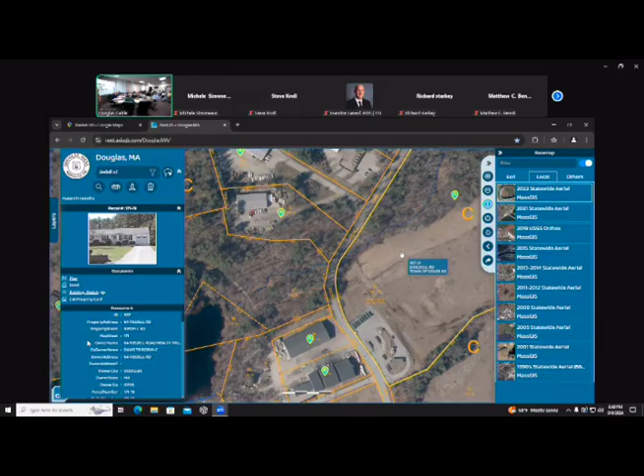So then what they want to do is put the pipe in right here, and the beauty is that this property is owned by the town of Douglas, so there's no problems with ownership or putting a structure on the site. So you're just going to go from this overflow area across to alleviate the flooding, so these areas do not get flooded. So it's not like the water's coming from the road or from any of these businesses, it's just backup from the brook here.

So Brandon, is there any reason why they just don't make the existing culverts larger? I'm guessing time and money. That makes sense. Not that they haven't done it in other places, but that's where we're at with this one.

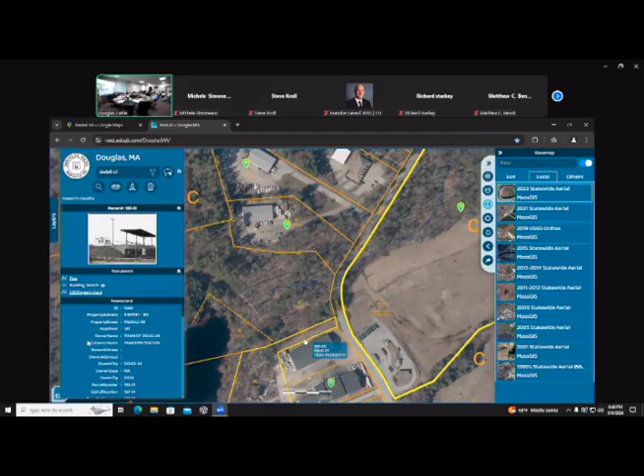Want me to make a motion? Or, I don't know, are we okay to, I know we have some concerns, but are we okay to let them proceed with this emergency order? Are we going to take a vote? Yes. I don't agree with that. Okay, so all right, we should maybe spend a little more time on the emergency, you know?

Well, you have your opinion, and that's my own opinion too. That's good.

Does anyone want to make a motion to approve the emergency order? I will make a motion for an emergency certificate for Rydell Road and 9 Rydell Road to put in 12-inch outlet pipes and discharge to the town property, for 30 days to do the work.

Okay, motion's been made. Does anyone want to second that? Brendan Doyle seconds. Motion's been made and seconded. Can I get a vote? Jim Foran, aye. Brendan Doyle, aye.

You can vote if you'd like. Can I abstain? Yes, sure you can. Kate Thompson, abstain. Mike Greco, aye. Mark Mungem, aye. Josiah Birch, no. Put that on the record, no. I don't agree with that. I'm surprised, Mark, that you're agreeing with this. But that's my vote, no. Okay, thank you.

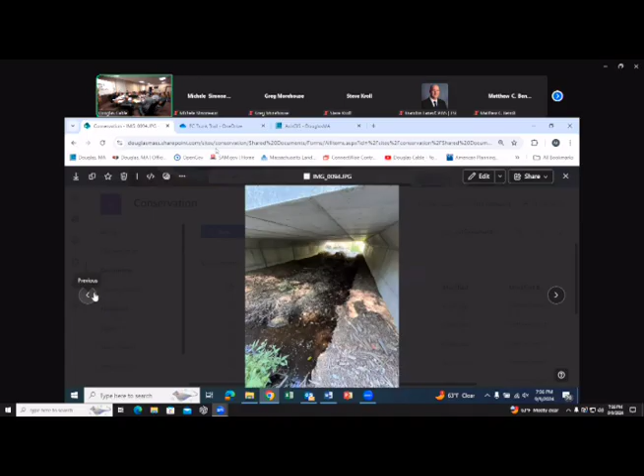Sometimes I don't take good pictures. It's kind of my own fault, usually. Like, sometimes I'll just look at it from too low or something. Brandon, you got to take the pictures. I'm just kidding. I mean, it all looks good, nice and clean. Looks like good work there.

Just wanted to make sure the basin itself has some habitat value, with low-maintenance grasses and wildflowers and things like that. It was a wet meadow mix used for the basin and side slopes. Good.

Anybody else have any thoughts or questions? Are we okay with this? Yeah, I'm okay. All right, you want to make a motion?

Sure, I'll make a motion for certificate of compliance for DEP 143-1076, McIntyre Looms Incorporated, off Legacy Circle, map 166, lot 15. I have a second, Brendan Doyle, second. Motion's been made and seconded to approve the certificate of compliance for Legacy Circle.

All those in favor? Jim Foran, aye. Brendan Doyle, aye. Kate Thompson, aye. Mike Greco, aye. Josiah Birch, aye. Mark Mungem, aye. Thank you. Thanks for your time, we appreciate it.

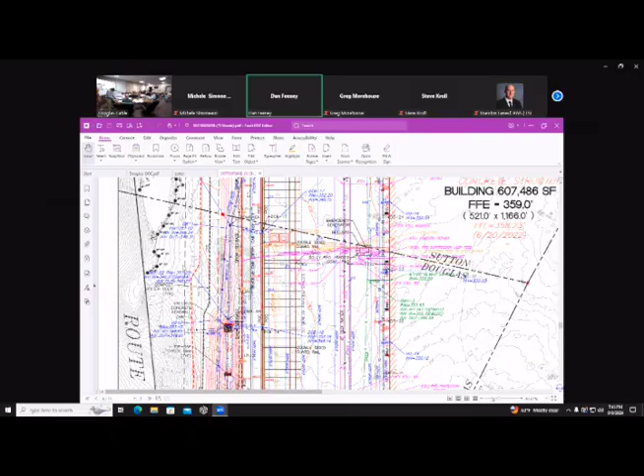As noted before, the red line's a little bit messy, but I'll zoom out a little bit here. The building itself is in Uxbridge, Douglas, and Sutton. The Douglas portion is the western portion of the site. There was an isolated wetland located along the Route 146 right-of-way, with the buffer zone coming out into this area. Scrolling down, there's another wetland along the Route 146 right-of-way that comes off the property. That 100-foot buffer zone comes right to the edge of the grading and then swings around, coming out further into the site down in Uxbridge.

This was the swale I referenced earlier - stormwater from a portion of the roof drainage as well as the northern section of the western loading court comes down into the swale, which then flows down, eventually discharging to one of the main basins on the site, infiltration basin 2 in Uxbridge. Very little of the site is in buffer in Sutton, but there was some, so we did give an order of conditions for that work. It's very minimal, thank you.

So, were there any deviations from the plan? Let me just ask you that - in Douglas, against, in the buffer?

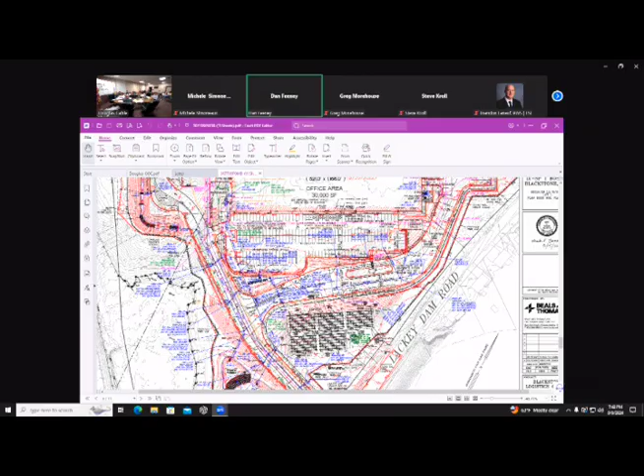The entry location to the building was changed from the original plans, from the center to the side of the building. An underground system was added up in the northern area of the western loading court. Groundwater is pretty deep at the site, but during wet periods all of the upgradient water would want to break out on occasion. So to stabilize that, an underground system was put in that discharges down into the swale area and eventually ties into the drainage system.

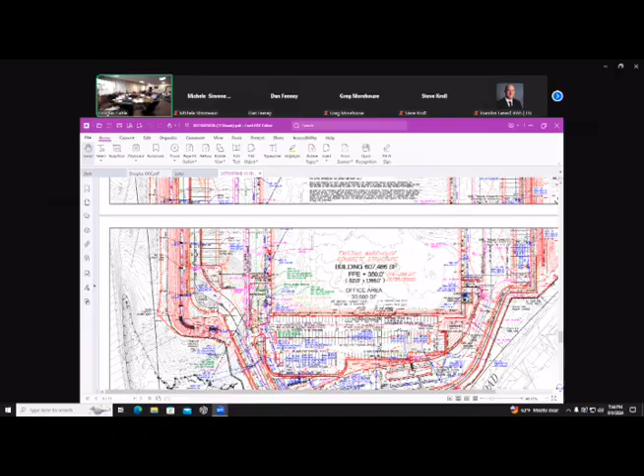Okay, thank you. Brandon or Matt, did you review this, and do you see any issues with it? No, I do not. I took some photos if you want to see them, but I think it was described very well by the applicant.

I'm okay to not see the photos. Does anyone want to see the photos? Okay. I'm good with this. You want to make a motion?

Sure, make a motion for a certificate of compliance for DP 143-1017 for Scannell Properties, 0 Route 146, map 141, lot 3, 4, 5, and 6.

Does anyone have a second? Second, Mike Greco, second. All those in favor of issuing the certificate of compliance for DP-143-1017 Scannell Properties? Jim Foran, aye. Brendan Doyle, aye. Kate Thompson, aye. Mike Greco, aye. Josiah Birch, aye. Mark Mungem, aye. Thank you very much. All right, thank you, I appreciate it.

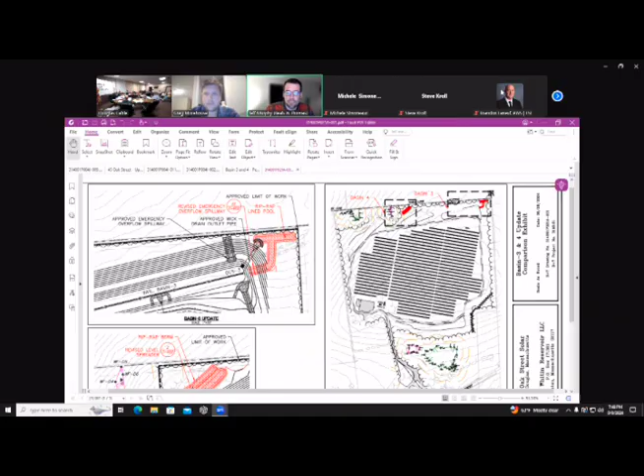As Greg mentioned, the changes are to Basin 3 and 4, along the far eastern side of the property. Basin 4 is the one that has the change in the 100-foot buffer zone. You can see on this blow up, the outer portion of the 100-foot buffer zone crosses through this figure. The grading of the basin shown in black is the originally approved basin, which the grading itself and the outlet control structure and pipe have not changed.

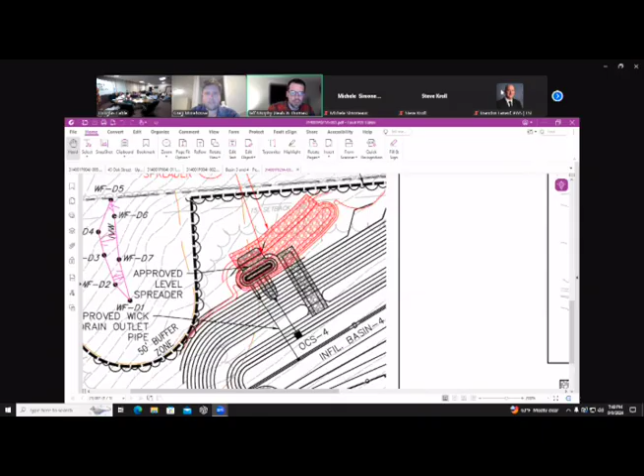The change is to the level spreader, or water dispersion feature, down gradient of the basin outlet pipe. Originally the basin outflow would come through this riprap swale and into this smaller area. As a result of discussions with the Krolls, the desire was to spread out the water over a longer, wider area, to have it go more in the southeasterly direction towards the upper right as you view the plan.

So in order to do that, we extended that level spreader pool out to the right as you view the plan, and added a bit more riprap down gradient of the level spreader weir, which is this more bold red line running through the middle, resulting in a little more riprap and regrading of that feature compared to the original smaller level spreader pool.

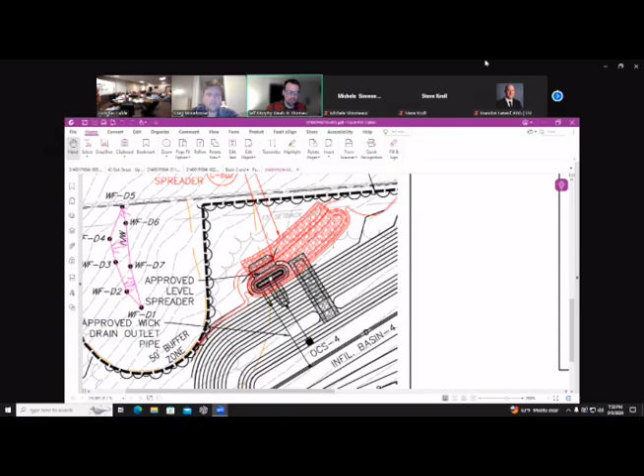Okay. It should be noted that this is within the approved limit of work, which hasn't changed. The dark dashed line with the tree line here is the original approved limit of work.

Is the pool still going to be in the same location, or is there not a pool at all with this proposed plan? It's the same location starting at the left side, but it just extends linearly more out to the right, generally in a similar location, but it'll allow the water to be carried out further to the right over a broader distance. That solid black line should be thought of as extending all the way over to the right side. Correct, yes, it would be extending all the way over, like a linear shaped bowl, with a curved weir that the water will flow up and over.

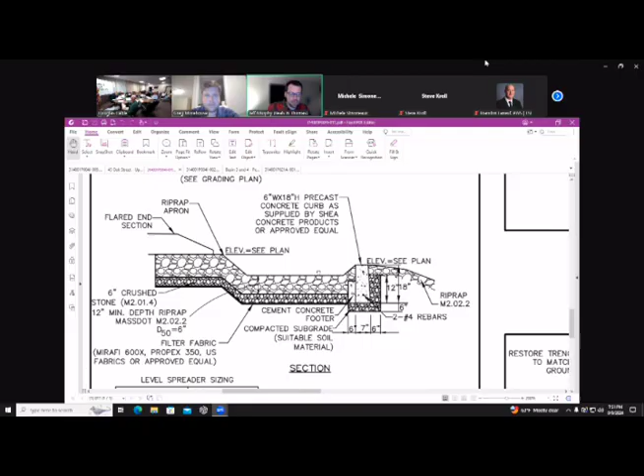Trying to show it in cross section. It's going to have a little curved weir here, and then there's some grading around the ends of the pool to contain the water and force it through that curved weir section.

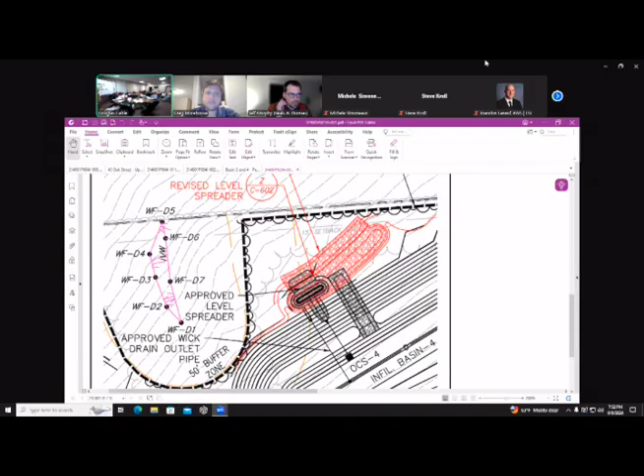So looking at this, it begs the question: is the outfall pipe already installed in the pool section that was part of the original plan? Or could that pool move out of the wetland buffer and just be to the right, outside the buffer zone? The outlet control structure and swale is already built. It is, okay. Alright.

This pool area looks like it works into the other riprap area coming out of the basin. Is that a spillway there? Yeah, that's correct, I forgot to mention that. The Krolls had requested that the spillway be directed into this dispersal pool, whereas before they were operating kind of separately. So yes, it would tie into that same pool.

So it looks like the area of work within the buffer zone is a little bit greater. How much more work is in the buffer zone with this plan? Looking at the outer fringes in red here, I think I got about 380 square feet, and about 100 of that is just more riprap to armor this end of it.

And then this outer portion will just be vegetated with grass. I think it's a better plan to include the spillway and have it go through this revised level spreader area, so from that perspective, I think it's a better plan. Do any other commission members have concerns or thoughts?

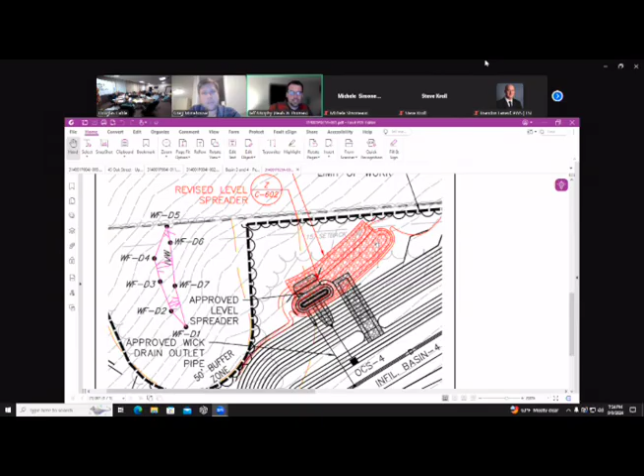I was curious why the change was made. Primarily to disperse water over a broader area rather than have it travel in a more concentrated spot, spreading it out over a greater distance parallel with the contour of the slope.

I'll try to explain, Brandon. The neighbor below this property is in Sutton, at the Sutton town line. They farm trees and other things on this property below, and they were concerned that they weren't getting enough water spread out, that it was becoming pointed and going directly to the wetland, and they wanted to receive some of the water. Is that correct, an explanation?

Can you hear me? Yeah, this is Steve Kroll. Can you hear me? Mr. Kroll. Oh yes, Mr. Kroll. Yep, I hear you. Okay, so what you just said is accurate for the Basin 4 changes.

This is a function of the way the slope of this land continues downhill for a fair distance towards Manchaug Pond, towards Stevens Pond, towards Shore Road. It's not parallel to the property line, and the goal was to have the water along the property line. There's a nice stone wall that's been acting as a dispersion or spreader for decades, if not hundreds of years, and the goal was to distribute the water so it doesn't erode the topsoil within our tree groves, which is what happened during the crazy rains.

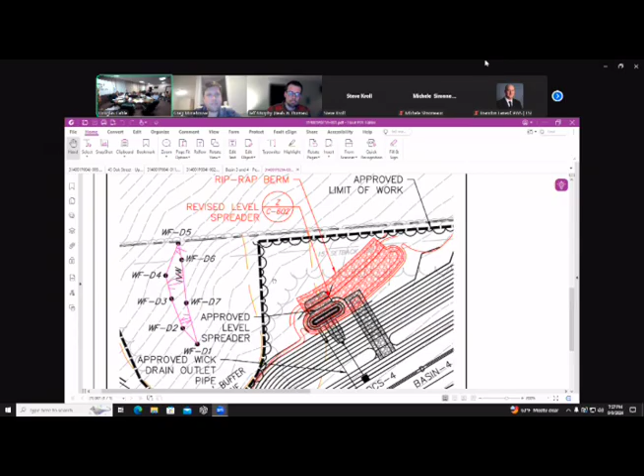Mr. Chairman, for the record, there was a peer review conducted for the planning board, and the planning board voted to approve this minor modification of their approved plan. But part of the peer review recommended they come to conservation because it encroached into the buffer zone. That's why they're here.

Are you good? I'm very good. I think it's an improvement. I agree.

Make a motion for Blue Wave Solar, minor modifications for 45 Oak Street, DEP 143-0989, to be approved as a minor modification, with minor modifications.

Okay, motion's been made. Is there a second? Second, Mike Greco. All those in favor of the approval of the minor modification for 45 Oak Street? Jim Foran, aye. Brendan Doyle, aye. Kate Thompson, aye. Mike Greco, aye. Josiah Birch, abstain. Mark Mungem, aye.

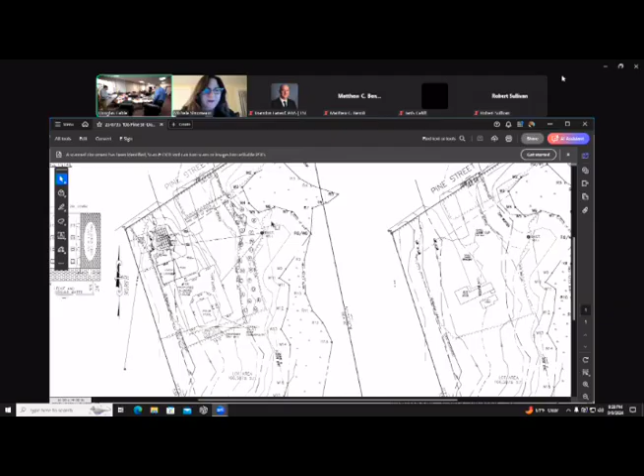Who's here representing this project? Good evening, Mr. Chairman, this is Michele Simeone of Stantec Consulting. I hope everyone's doing well tonight. I'm here virtual, and my colleague David Glenn, the stormwater engineer on the project, is there in person with you. I believe also attending virtually is Bob Sullivan from the Douglas Water and Sewer Department. Yes, I'm here, are you on? Great - Bob, did you want to give an introduction to the project, or do you want me to just dive right into the work being proposed?

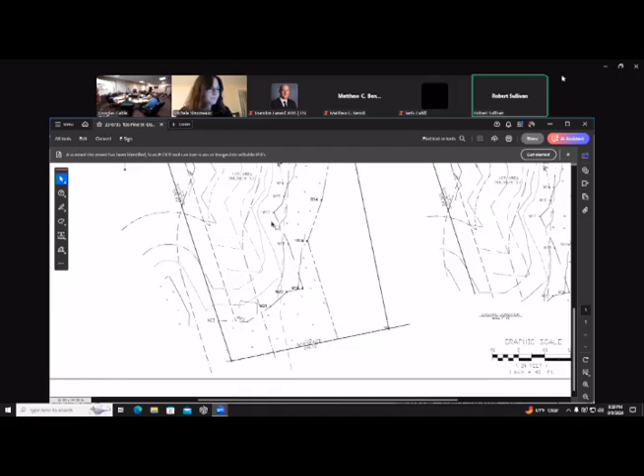May I share my screen to give you an overview of the plans and the work area? Yep, we'll get right on that. Sure, one second - sending a request. All set. Good, introduce yourself, Bob. I just want to say Bob Monero is Economic Development. I don't think that mic's on. Thank you, Bob, apologies, I can't see the room there. Did that request go through to share? It did, it's going through.

I'm not seeing anything on my end pop up. Yep, just click that green arrow. There we go, all right, I think we might be in business now.

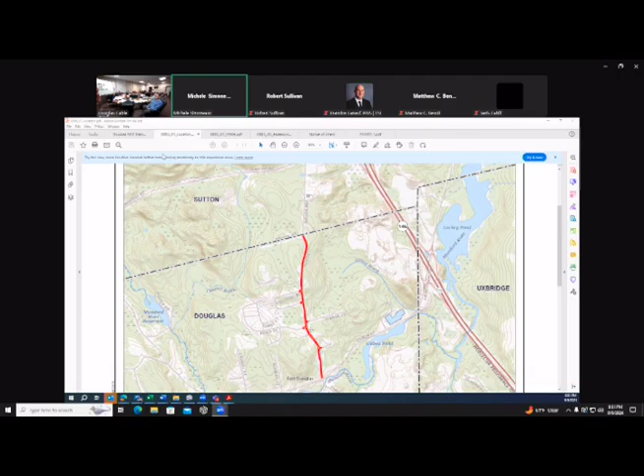Can you see a locus map? Okay great, so just to introduce the project, we're here on behalf of the Town of Douglas Water and Sewer Department. This is a notice of intent for the project called the North Street Roadway and Utility Improvement Project. It's primarily in the Town of Douglas with a little piece in the Town of Sutton.

The project, if you can see my locus here, is located along North Street within the town's right-of-way. The southern terminus of the project is at the intersection of North Street and Gilboa, and then it runs approximately 5,500 linear feet north, right to the border of Sutton.

The project is largely within a previously disturbed impervious area. Like I mentioned, it's the right-of-way, surrounded by residential properties to the east, south, and west. The actual project includes installation of water main, sewer main, and drainage improvements, as well as widening and straightening of the roadway and construction of an ADA-compliant sidewalk.

The roadway currently is configured in an irregular configuration, and there's no sidewalk. So the project will result in the widening of the roadway so it has a consistent width and a sidewalk to the west.

The project is being filed under the Wetlands Protection Act and the Town of Douglas General Bylaw, as well as the Conservation Commission Town of Douglas policy, just for the record, and then we waive the reading of the notice of intent public hearing. So just to provide that for the record.

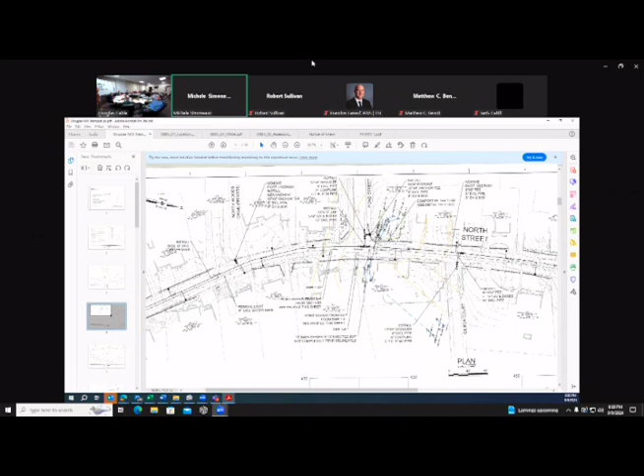And with that, unless there are any questions on that aspect of the project, I'll turn it over to Dave Glenn to dive into more details about the stormwater improvements and the drainage. Okay, thank you. Any questions? Good, Dave. Thank you, Michelle.

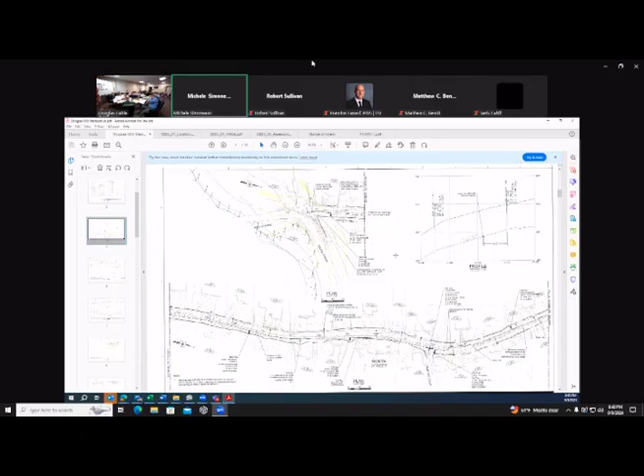You're welcome. It's on. Can you go to some of the drainage plans, Michelle? Maybe the first sheet. Which one specifically, Dave? The first sheet, which is at the lower intersection. Yeah. I'll do that. Right here, let me know if you want me to zoom in or out. That sheet 105? Another 5. There we go, Dave, that's what I think.

What I can do is give you a quick overview of the stormwater management system. The proposed system itself will consist of stormwater BMPs to help improve the water quality, conveyance of the water, control of the water runoff, and provide some infiltration.

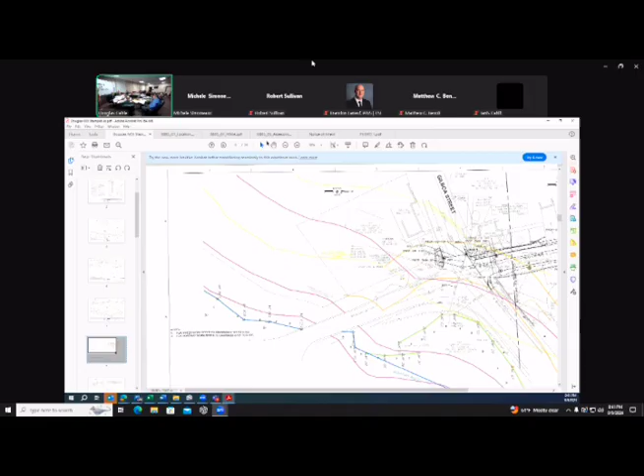The proposed project will end up replacing or abandoning the existing system that's out there now. The existing system is pretty old. It's corrugated pipe in a lot of locations, catch basin to catch basin. Some of the manholes are fairly old too, so basically the proposed stormwater will end up putting in a whole new closed drainage system within the whole corridor.

Proposed BMPs will include deep sump catch basins with hoods, new manholes, and will also include a whole new piping system with precast structures. All the work will be done within the actual roadway pavement itself within the project. There are 3 existing outfalls within the project corridor.

As Michelle had mentioned, one of the first outfalls is an existing 18-inch at the intersection of Gilboa and North Street. That 18-inch outfall will be retained. There'll be no work done at that outfall location. The proposed drainage system will come down at the intersection, tie in with a new manhole, and that'll be the extent of the work. So all that work will be done outside of the actual headwall location itself, and will all be done in the buffer zone area for that location there. That's the existing 18-inch outfall.

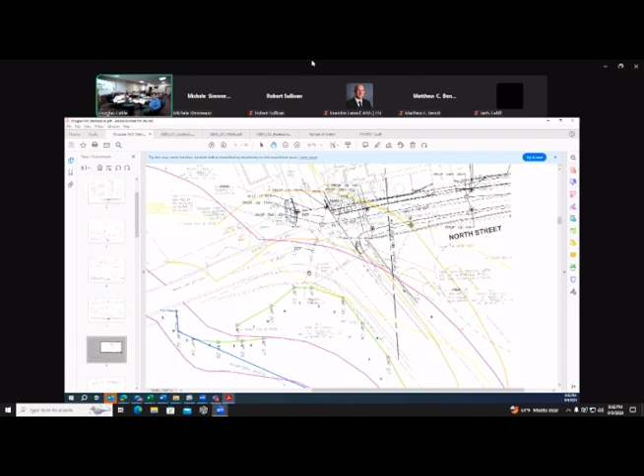The other outfall, as Michelle had mentioned, was at Pond Street. Can you go to a couple more sheets, Michelle?

It's this one. 106. There we go. Yeah, that's it right there. This is the second outfall.

The existing outfall is an 18-inch RCP pipe. Similar to the intersection of Gilboa and North Street, we'll be tying into the line within the actual roadway pavement itself. That existing outfall and pipe will be retained. There'll be no work done on that outfall for the second outfall. And then the third outfall would go toward the end of the project, Michelle.

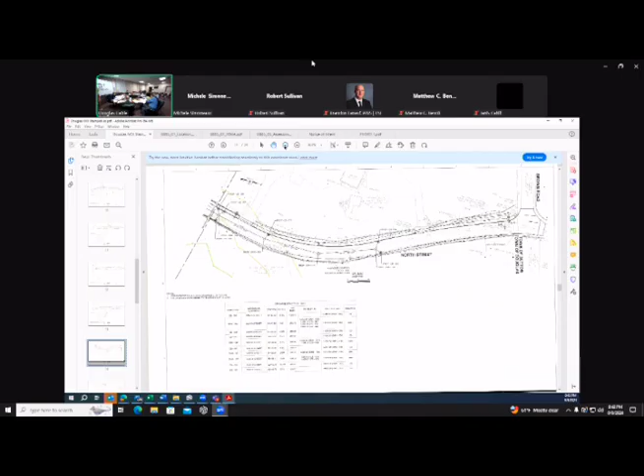So you're saying that with the sidewalk added and the roadway wider, there's more impervious surface, but the pipe sizes at the outfalls do not have to be increased? Correct. The existing 18-inch that goes to Mumford River is going to be retained. The pipe system going to that 18-inch has been increased. All the existing pipes that were there currently were only 12-inch pipes, so the conveyance system going down to those outfalls has been increased, but the actual outfall itself is being retained. This is an 18-inch outfall, and the one at Gilboa is an 18-inch outfall. Those are being retained. And the biggest pipe that's being laid is 18-inch as well, right? Yes, yes. But the calculations don't require that to be a bigger pipe? No.

The increase in impervious area is approximately 0.6 of an acre. The majority of the increase is associated with the sidewalk. The actual roadway increase is around 3,000 square feet, very small. The majority of the increase in impervious is the sidewalk installation.

Is that going to be a 5-foot sidewalk all the way down? Yes. Wow. Is this the plan you wanted, Dave, or do you want me to keep going? No, that's the plan. Thank you, Michelle.

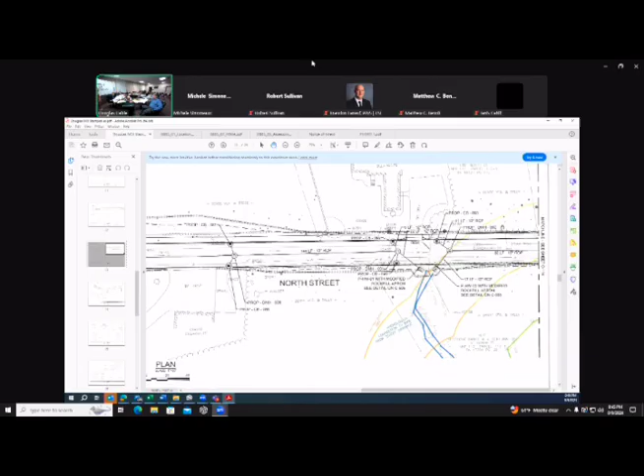This is the only pipe that will be actually increased in size. This is the 12-inch existing cross culvert that's down, about 300 feet upgradient from the town line to Sutton. There's an existing 12-inch cross culvert in that area. Part of the closed system is now going to discharge in that general vicinity. There's going to be 2 outfall locations there. One pipe is a 12-inch and one is a 15-inch pipe.

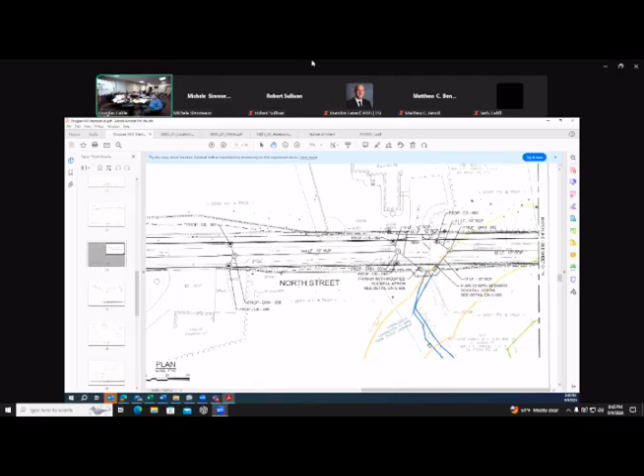That's on sheet C-113. Were there existing outfalls there already, or? There's an existing cross culvert there, a 12-inch cross culvert, so that's going to be removed. With the new installation of the new closed system, there'll be 2 outfalls in that same vicinity, one a 12-inch and one a 15-inch pipe. There'll be a head wall, and riprap protection at each outfall for the work itself.

And that pipe there was undersized to begin with for the associated drainage area. I've been reading a lot of stories lately about drainage systems, old pipe sizes, and issues with them not being large enough based on the new amounts of rain we're getting, torrential rains, and them creating issues. So that's why I asked about the 18-inch pipe down at the bottom of the hill, as to whether you guys strongly feel that's large enough for future rains.

Based on the current regulations, yes. But based on current or based on future? Well, whatever the current DEP regulations are. Okay, so you're talking about TR-55, is what you based the stormwater on? The NOAA 14. NOAA 14, that's the answer I wanted to hear. That's the new one, Mr. Chairman. Okay, it's when it's like over 8 inches on the 100-year storm as opposed to 7. So that's good, but again, the closed system is not sized for a 100-year storm.

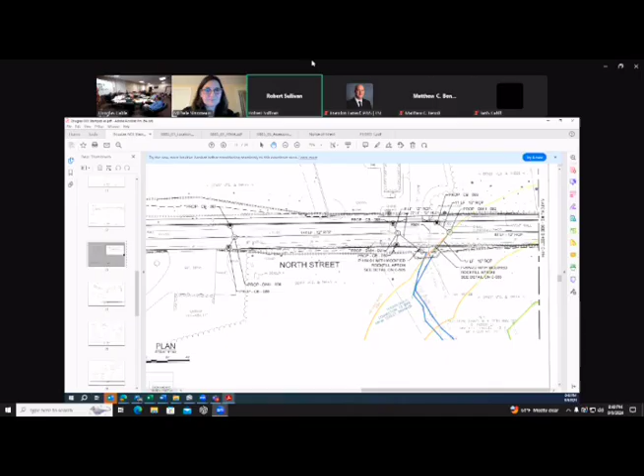Some of the scheduling is dependent on the grant applications we have in. If those are successful, the likelihood is to start in the spring. This is probably a 2-year project overall. There's another component to this project, which is the water storage tank, but that doesn't have anything to do with this hearing. So overall, I think it looks like it's about a 2-year project.

Okay, starting spring next year, hopefully. No, thank you. So I'm just reading the different phases here.

Phase 1: install the sediment controls, equip the catch basins within active work limits with geotextile fabric inlet protection, saw cut the pavement, excavate the trench for the new water main.

Sidecast material to dump truck, install the utilities, backfill the trenches, which, by the way, if you're installing a new utility within the footprint of an existing road and you backfill the trench at the end of each day, that's actually an exempt activity under the Wetlands Protection Act. So if you're in the buffer zone only, if you're in riverfront area or you're in the bordering land subject to flooding, which is the 100-year floodplain, it's not exempt.

So the point is, for most of this project, with the exception of the area on the very south near the Mumford River, the installation of the water line is exempt, as long as they backfill the trench each day. Install the temporary pavement, stabilize.

And then phase 2, it reads: install the permanent pavement, install the sidewalk, curbing, and driveways, site and roadway cleanup, final restoration, and then finally the removal of the erosion controls. So I just wanted to go over that, or see if somebody could go over it. And now that we have the timing, I just want to see what was involved with the phasing.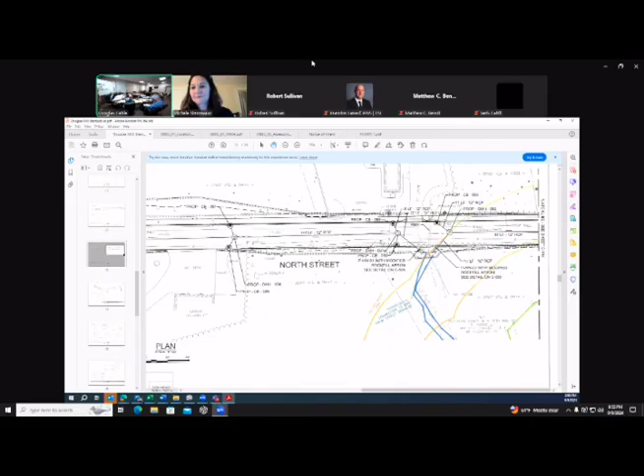Sure. Virginia, I didn't hear - is there curbing associated with the roadway? There'd be granite curb on the sidewalk. On the sidewalk side only? Sidewalk side only, and spotty Cape Cod berm on the other side, if needed.

Is the sidewalk directly adjacent to the curb, or is there a grass strip? No, direct, it's right up against it. We only have a 30-foot right-of-way from Prentice Court to the Sutton Town line, a 24-foot road and 5-foot sidewalk, so it doesn't leave much room.

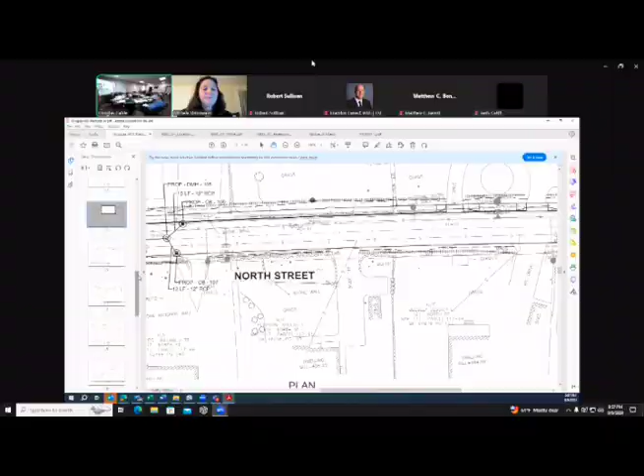So for me, my loaded question, and I know you can't answer it, is we've improved Gilboa. Gilboa has a sidewalk. Now we're putting a sidewalk on North Street, and it all empties out at a bridge that's not wide enough to walk on. So when is the bridge going to become part of the project to create a sidewalk? That's next, in 2 years. That's what I wanted to hear, Bob. I've been working on that for about 2 years now.

Well, I know it's a bigger project, we come in from three directions with improvements, and the middle is just awful. Exactly, we're directing all these improvements to a choked area that you can't even walk across. Hopefully we'll be safe soon. That's what I wanted to hear. Thank you. It's all part of the river project. Yeah, but it's much needed.

Okay, I don't have any other questions for tonight. Does anybody else on the board have any questions?

The only thing we still need, Mr. Chairman, is the DEP file number. I know, we'll have to continue it because of that, right?

And the conditions that Brandon recommended, in addition to the condition I recommend, which goes without saying, is to hold a pre-construction meeting to go over traffic flow and all that stuff. I think that's a standard condition now. That's in the standard -- if I remember correctly, this is when Joe Fitzpatrick was chair, the commission voted to make pre-construction meetings a standard special condition. Good, so it's in there.

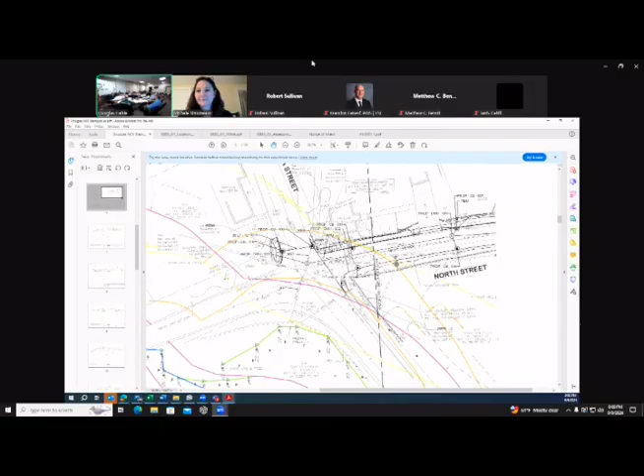How is this being funded? Grants. The town just applied for a $5 million MassWorks grant. We have, for the total, it's about a $14 million project, 13.5.

We applied for a $5 million MassWorks grant. We should find out mid-October whether we get that or not. We're hoping we get all 5, but we're trying to make contingency plans if they only give us 4. You just can't count on the full 5.

The developer, this project is the infrastructure to support the Pine project. Is everybody aware of the Pine project? They're before the planning board now, or they will be very shortly. They announced their intentions. The Pine project is a 2.8 million square foot rebuilding warehouse facility. This is the infrastructure to support that building.

The water storage tank, we've eliminated the fire tanks on the 3 different sites, the Tri-Town, the Cubes at Gilboa, and the Pine project. Those developers have taken the cost of those tanks and put it towards this project, so we have some funding source coming from there, about 1.8 million. The rest of it is from the developer for off-site improvements, CRG Realty.

Will this project have to get voted on and approved by the townspeople, or because the funding isn't through the town, does it not have to be? Well, it depends. If we don't get the 5 million MassWorks, we have to come up with some other funding source, and that will probably be a town meeting vote.

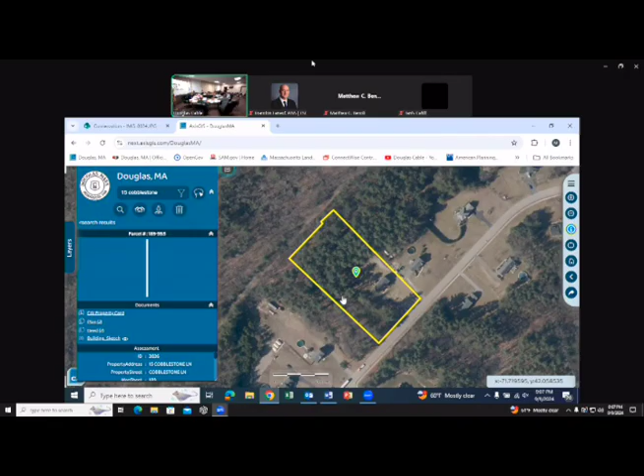Are the solar panels already in place? No. They're waiting to have the trees down at the same time when they're planning to do the solar. There's southwestern trees on the lot about here.

Okay, you can see them shading the roof right now in that picture. And where is the wetland in that picture?

We have the benefit from the last application to say where the wetland boundary is. It's in the woods, right where the yellow line comes from, maybe to the edge. It's tough to say because this really looks like the wetland on 19. It looks like a lot of it is over there.

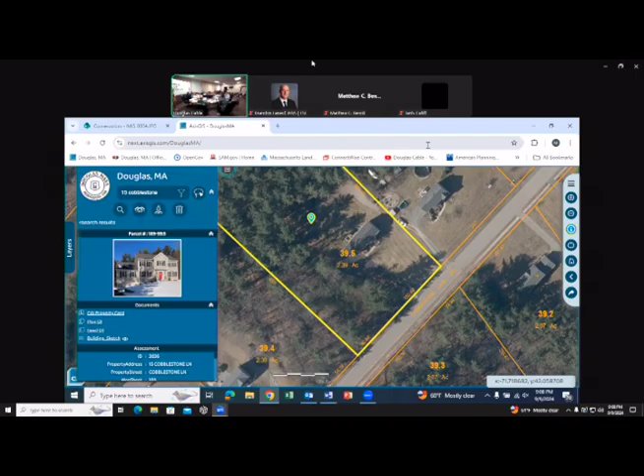So looking at this picture, you said it's those tallest trees I can see, probably 1, 2, 3, 4, 5. Actually, this other picture is the one that did not show on the satellite, it's on the first page. Let's flip it over. Yeah, the ones with the X's.

Looks like there's other trees all around these ones that are proposed to come out. So that's 2 big white pines there, 3 side by side, okay, there's a third one here. And then the other 2 are right here, I believe.

The X's are shown pretty close together on the plan, not really spread out. These 2 are really tight together, I see 2 there. Yep, those are the ones farther down. These are those 2 right here, one behind it.

Will the other trees adjacent to these be left? Yes, only the 5 that were identified will come out. This one, that one, these 2, and then the one in front, over here. 1, 2, 3, 4, and there's a 5th right here.

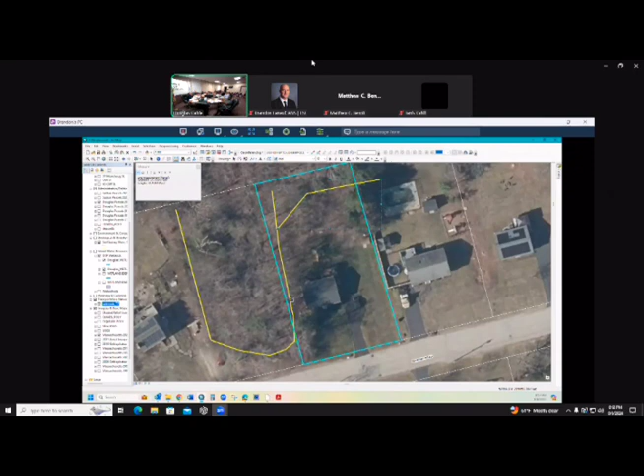So let's zoom in and pull some digital tape from the edge of the house. It's close, maybe 10, 15 feet. Wait, that's not the right house. I thought it was this one, I thought this was the one we just did.

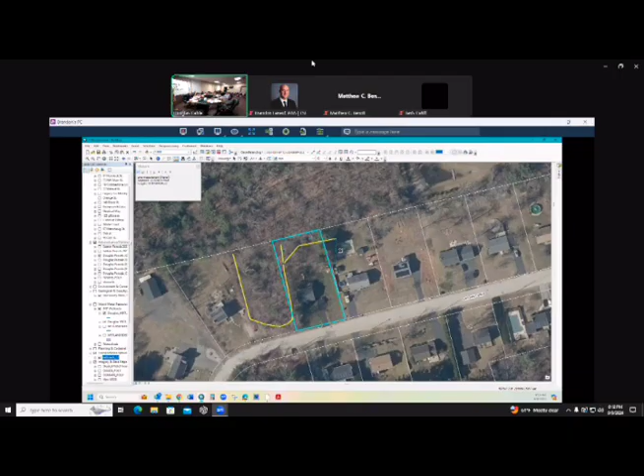So where are you? Not there, in another town. Well, this is Colonial, right? No, Cobblestone. Cobblestone, Colonial, cobblestone. Well, I just wasted everybody's time, never mind, it looked close. Nobody stopped me. You were really rolling. I was getting excited, man, my bad, sorry about that guys.

All right, let's go to Cobblestone. It's not even 1 a.m. yet.

It's a long Monday, it's Cobblestone. Where's Cobblestone really? It's off of Franklin. Oh, I'm still learning the south town, a lot further south. Well, you're almost there now. There you go, right there. You just went over it.

Whereabouts? I've been on Cobblestone, but that's Brookside, and then it's Franklin. Oh, right here. Right there, okay. Oh my goodness, wow, they looked a lot alike. Yeah, both green, huh? Lots of green rectangles, you know?

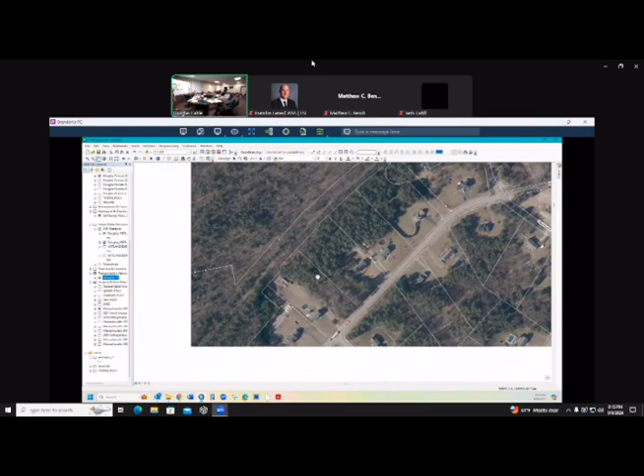Okay, let's do this again. It's this one right here. Okay, let's do this exercise one more time. Thank you for your patience. Sorry to waste everyone's time. It's okay, no, it's an experience.

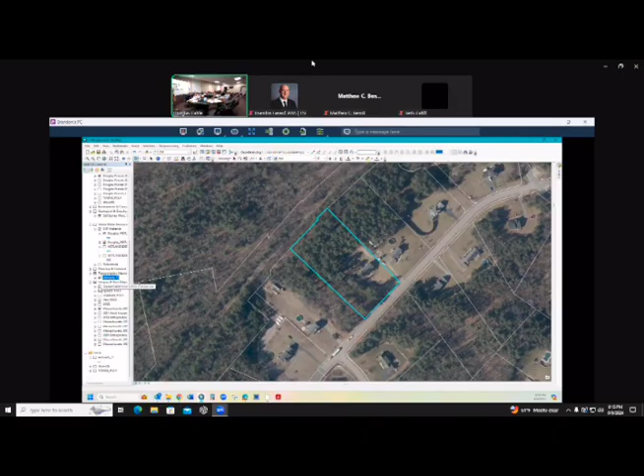All right, just give it a second to do its thing. Not so easy to tell. Well, we got this thing. I think this is a path, actually, so I remember this path. The wetland was on the left side of this path. So if I was to draw a line where the wetland is, it'd be something like this, because this is part of the old gravel pit, something like that, okay.

I'm going to make a happy little yellow line, okay? And we're going to take this off. We're going to zoom in. I think you got more room than you think. He does, yeah, yep, okay, we're good. Great.

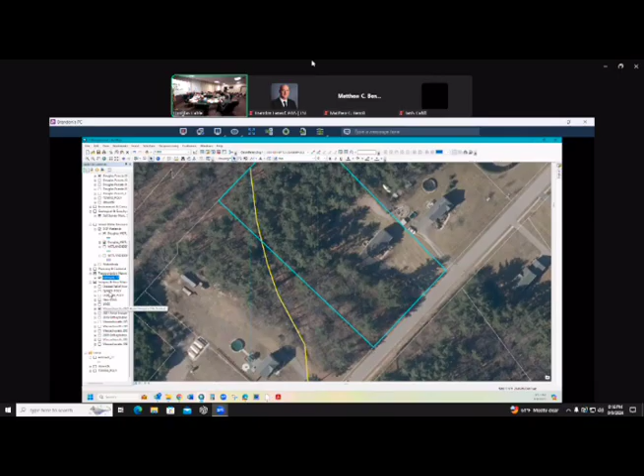Valerie, you should be paying him. He made it, no, he recovered. Yeah, he did recover, didn't he? It's not the mistake, it's the recovery. That's right, the mistake is what you get the respect for. And we also learned something new.

All right, any further thoughts on this? Any concerns? No, all right, I'm good. He's got to close the meeting. Want to close it? Oh, I can close it. That's right, I'll close the public meeting for 15 Cobblestone Lane.

Want to make a motion? I'll make a motion to approve the RDA for 15 Cobblestone Lane for the 5 trees to be removed and to leave the stumps. Negative determination.

Motion's been made, is there a second? I'll second it, thanks Josiah. Motion's been made and seconded. All those in favor of approving the negative RDA determination for 15 Cobblestone Lane? Jim, aye. Brendan Doyle, aye. Kate Thompson, aye. Mike Rocco, aye. Josiah Birch, aye. Mark Mungem, aye.

Thank you very much. Do you need to do any action after that? I'll have it drafted for you tomorrow, and Jen will be in touch. Thank you. All right, sure thing. Thank you. Brandon, you got papers for us to sign?